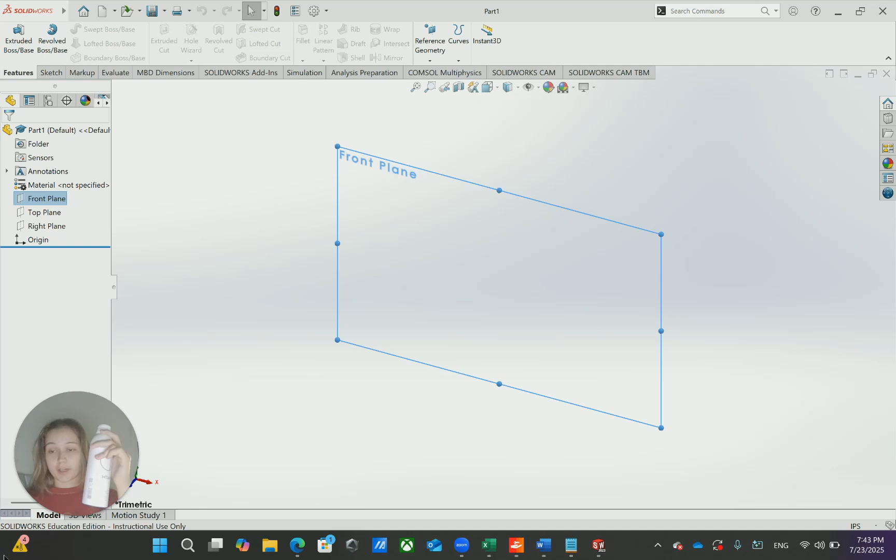First we need measurements for your Stanley Cup. I personally don't have one, but just take it, measure the circumference, and also measure how far up the bottle you want it to go. Let's say you want it to go halfway, so just measure halfway. Remember that the cup gets wider, so the holder is mostly just for the more narrow part, and that goes about exactly halfway.

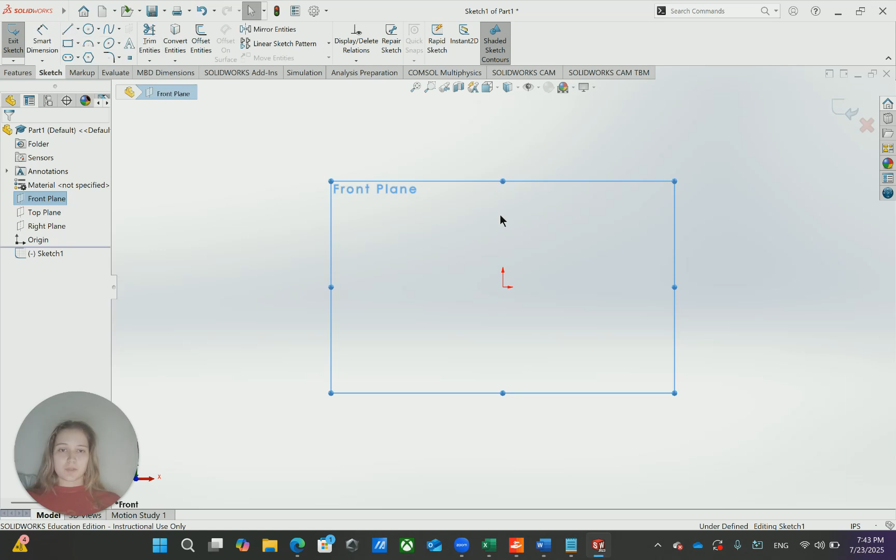So let's start. We've got a front plane. First, I'm going to do a revolved boss base, and I'm going to sketch my axis. So I'm just going to do a line, and immediately I'm going to dimension it so that we get the right dimension. Let's say this is going to be about 20 inches.

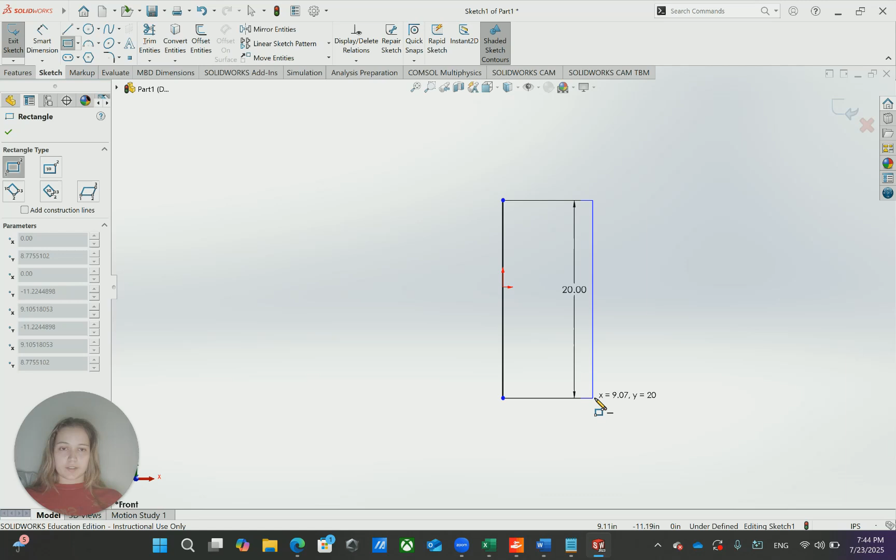Again, go off of the measurements that you get. Okay, now we're going to do a rectangle. I'm going to make it something like this.

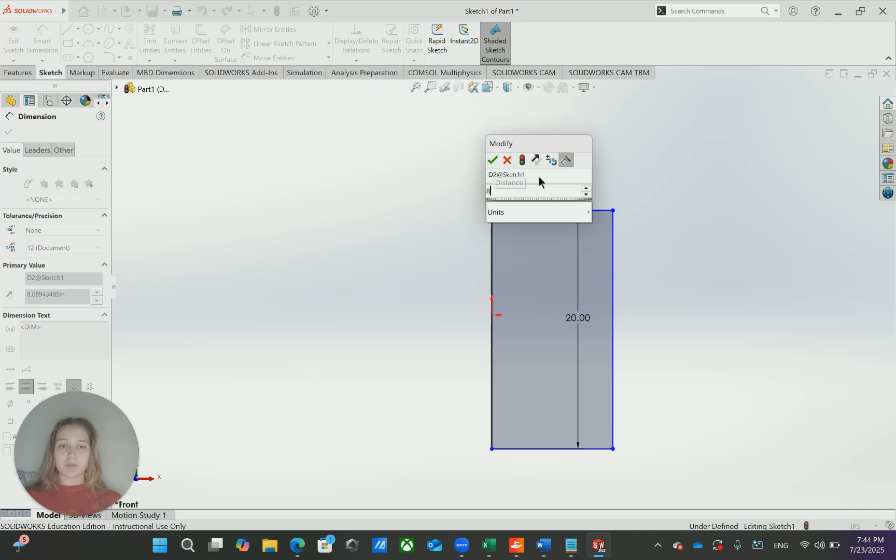And I want to measure out... let's see, I'm going to measure out about 6. I'm going to measure out about 8 for my thickness. So I'm just going to do 8 and smart dimension it. This is going to be the diameter of your cup, and add about half an inch to that so that your cup can slide in easily.

So I'm going to assume this is 8, and now I'm going to draw another rectangle, making sure that it matches my dimensions. And now I'm going to trim my dimensions.

Now I'm going to measure up from the bottom. I'm also going to measure out from the bottom. If I want to know how big this is, this is like a cheating method, but you basically just draw a line. So this is 2.14. So what I'm going to do is draw a line here to make it 2.14. There are a couple more professional ways to do this, but that's just how I do it.

So we're going to draw a line from the bottom here, make it 2.14, and we've got our dimension. I'm also going to draw this. So what is this? This is going to be our bottom pit, and this is going to be our side holder. So I'm going to trim entities.

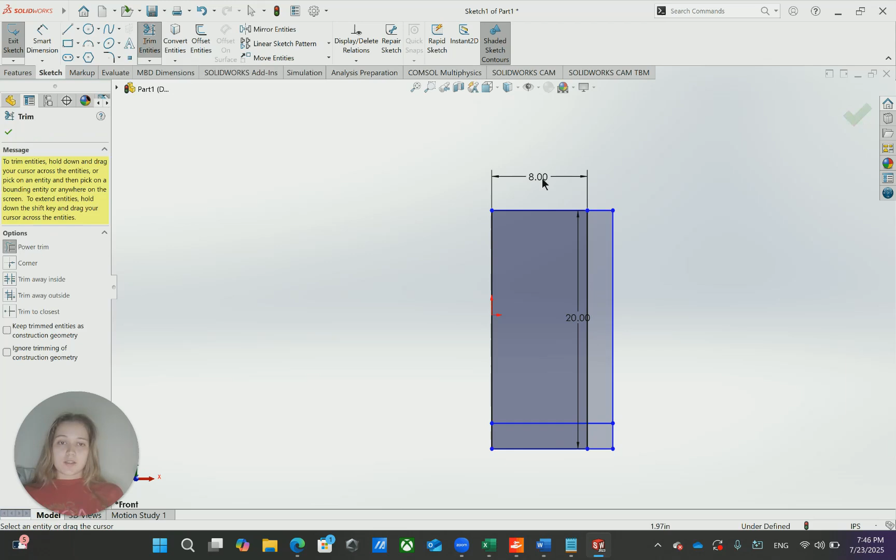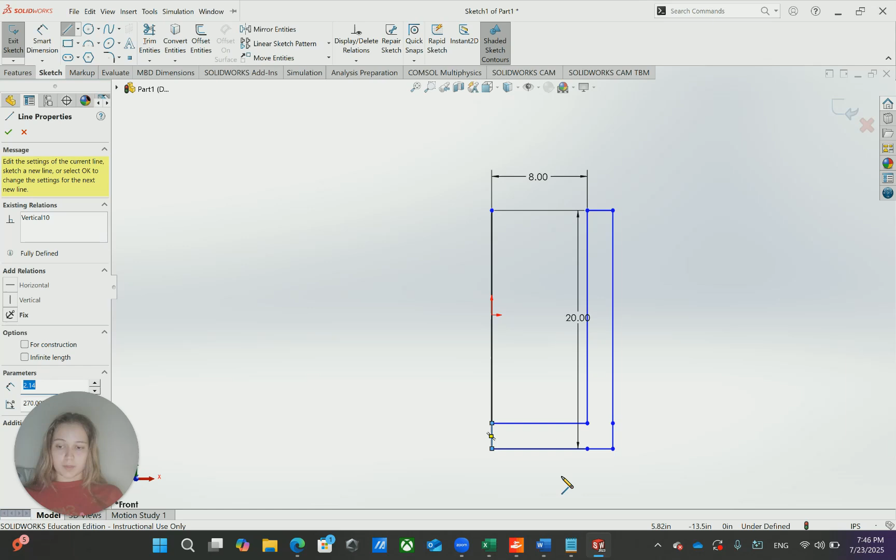So the only thing that I need - actually I should not have done that - is this side, okay? It's kind of like a side border. And don't forget to connect this entity, because otherwise it's not going to fill in. It's going to be an open sketch.

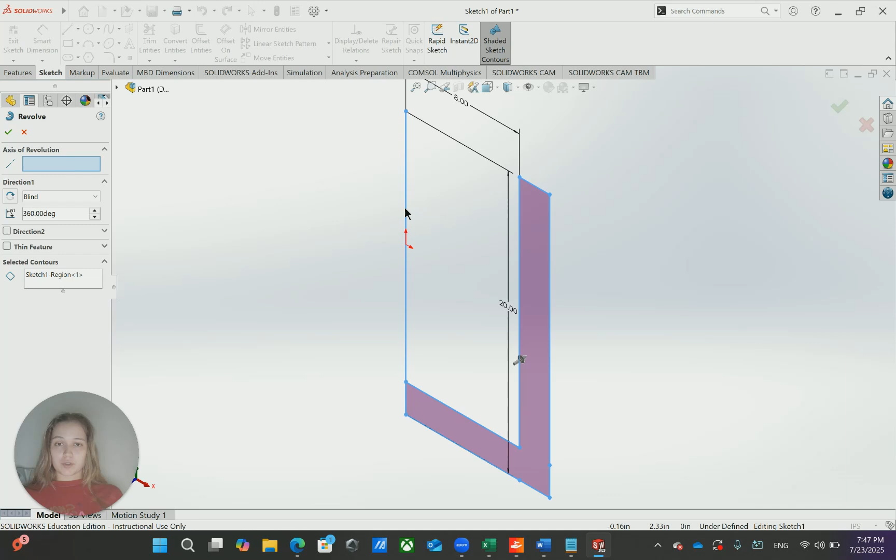So now I have my axis and I have how I'm going to revolve it. Select the contours that you want to revolve - in this case, it's going to be this specific L shape. Now my axis of revolution is the line that we created beforehand, and we can immediately see what this is going to look like. So we have the bottom, we have the sides, perfect. I'm going to click OK. Alright, so now we've got basically a simple cylinder.

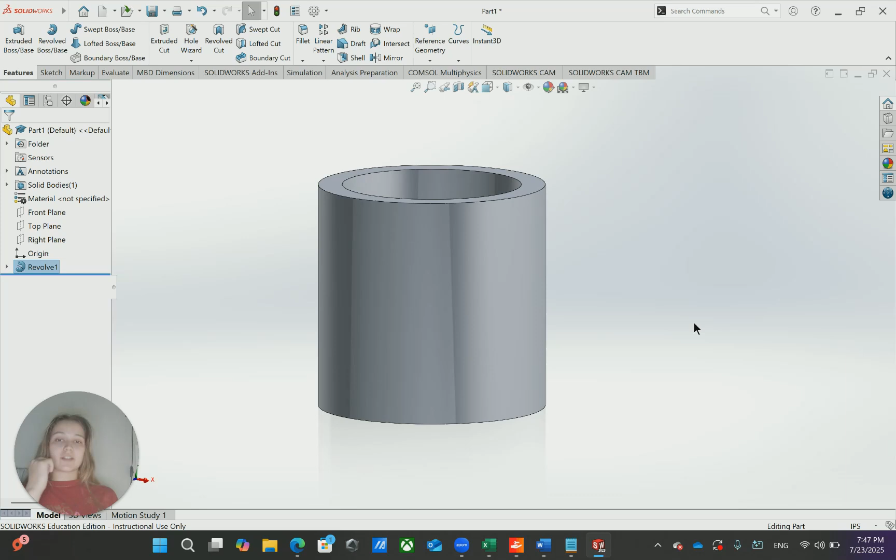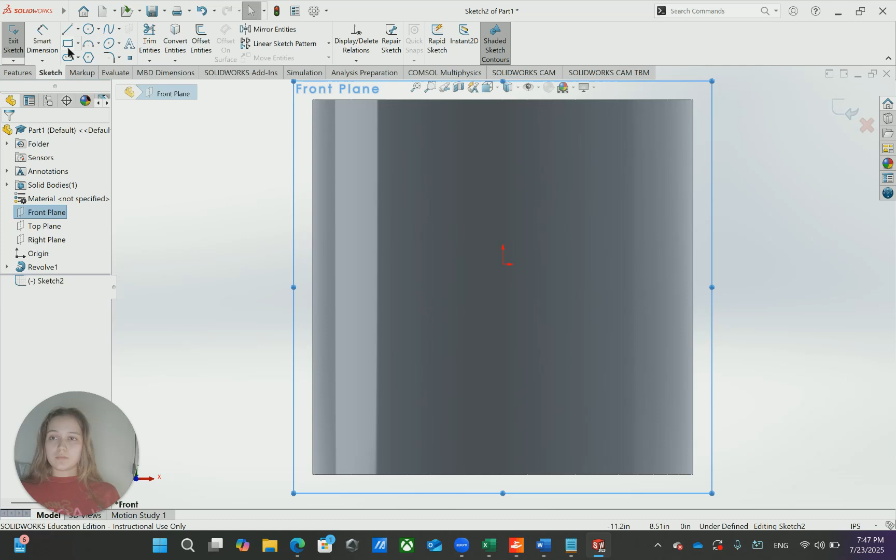Next, what I'm going to do is pattern some cuts in it. I'm going to select my front plane, which goes straight through the middle. Make sure that when you're drawing, you're on that axis, because it's going to make your drawing much easier. And I want to make an extruded cut, something like this.

Okay, so this is what I want.

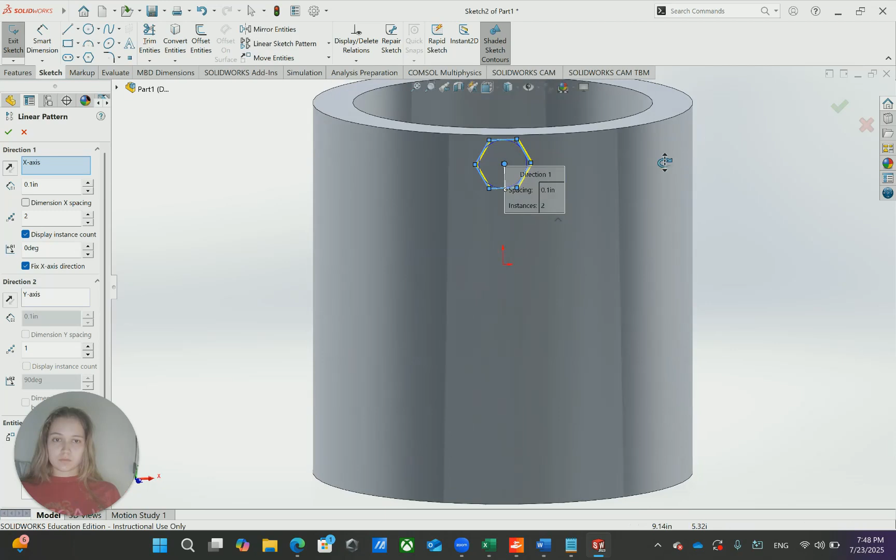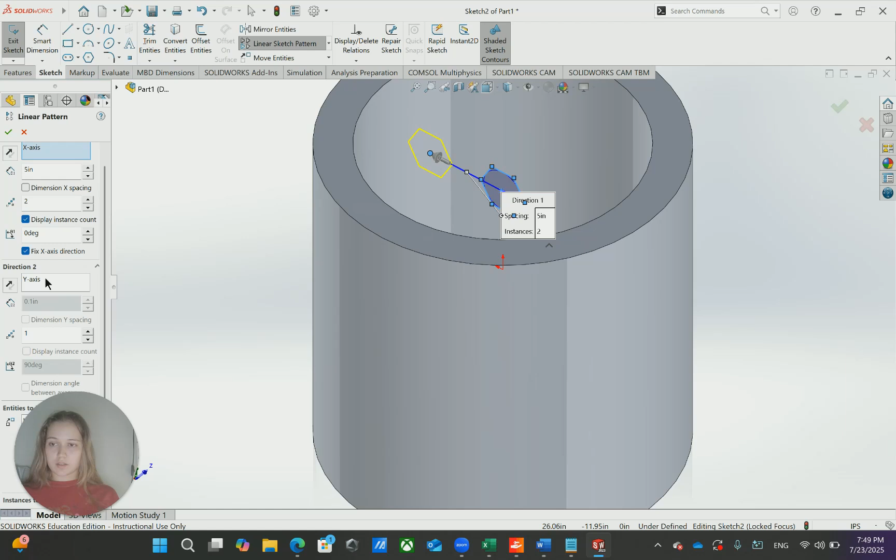So what I'm creating right now is patterning. I want to have these hexagons basically all over my cup, so I'm just going to test out the dimensions. Maybe this is good. I'm going to create a second direction also, make two this way, and I'm also going to make the spacing as 5.

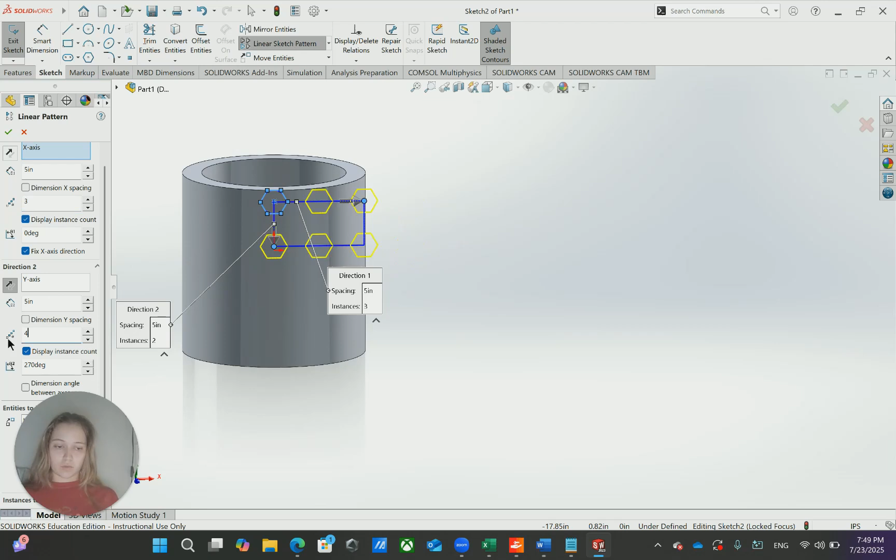Only I'm going to make it down. So to flip the direction, you just click on these two. Let's say how many do I actually want? I want to have maybe 3 this way, and then maybe 4 down. Alright, something like this.

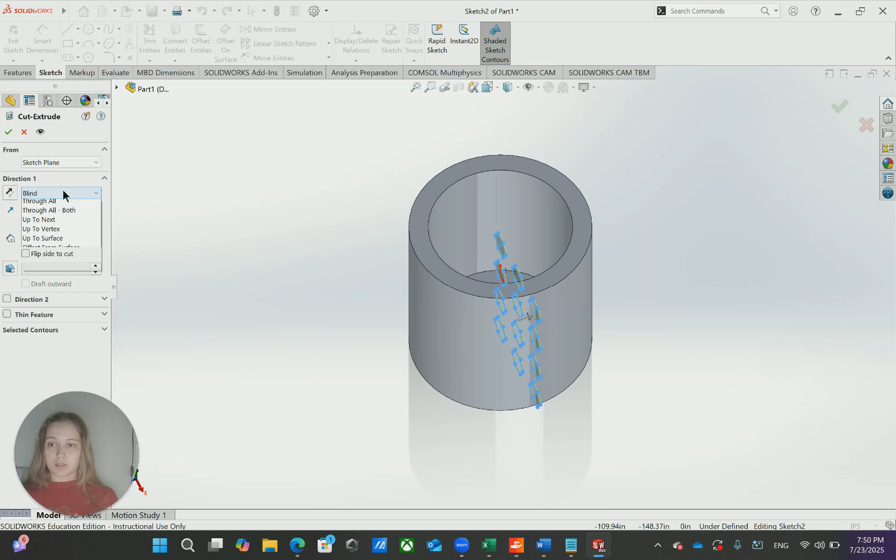Now, when you exit your sketch, you need to make sure that you're cutting on both sides. Right now it's only cutting this way and it hasn't been cutting through anything because we don't have a solid surface, so I'm going to do through all, both, so that way this cut is going through both sides. I'm going to click OK, and look, we've got our sides.

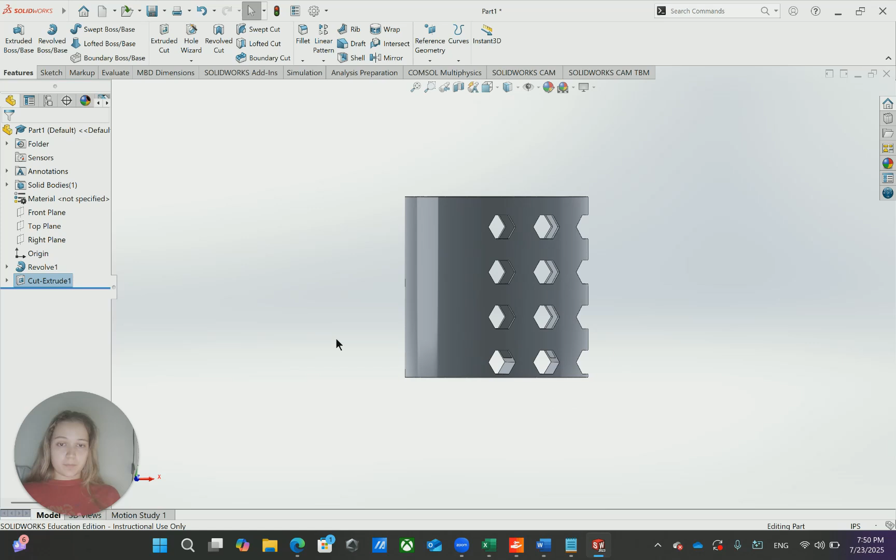Okay, so now you can keep it like this if you'd like. I'm going to make it symmetrical, and the way to do that is I'm going to select my right plane, then select the mirror feature.

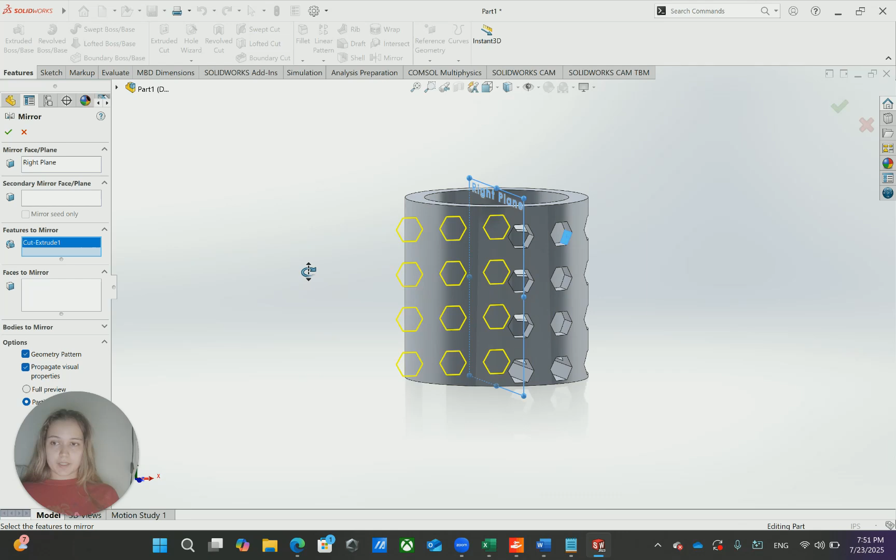So I'm going to click features to mirror, and then I'm going to click on here, that's going to be my cut extrude. I'm going to click OK, and now I have a symmetrical cut.

Also, just a quick tip: sometimes if your cuts are overlapping, SolidWorks is going to make your entire pattern disappear. So what you want to do is click on geometry pattern, like I clicked in the video, and that way it eliminates this issue. Just so you know.

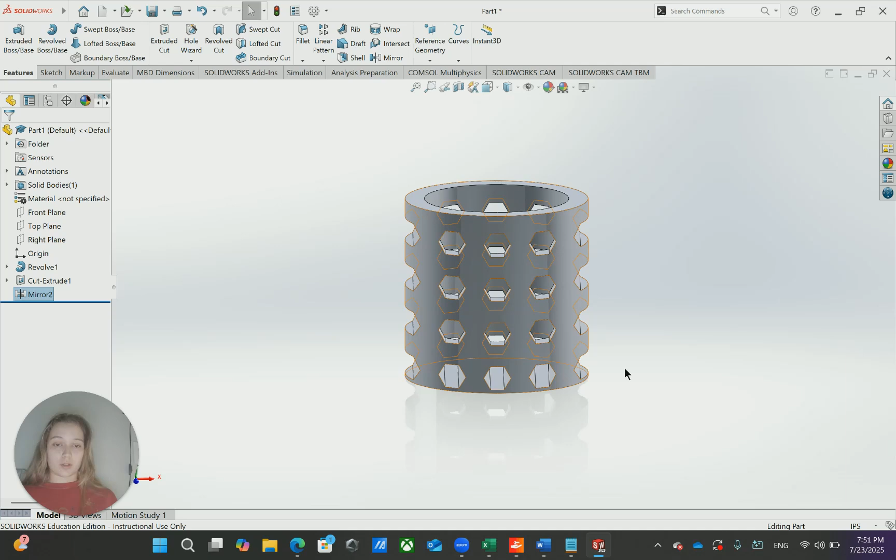Alright, so just like this, we got ourselves a holder, and you can do this with any kinds of patterns that you like. You can also smooth the top edges if you want.

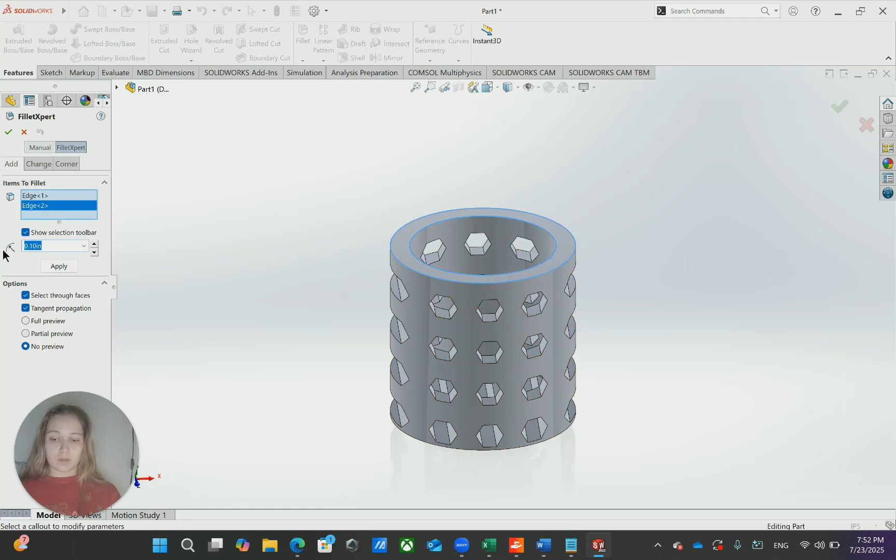So let's say I wanted to make a fillet. I'm going to fillet this and fillet this, maybe to like 0.1 inches or something like that. To be honest, I don't like how this looks, but if you are into something like this, that's also what you can do.

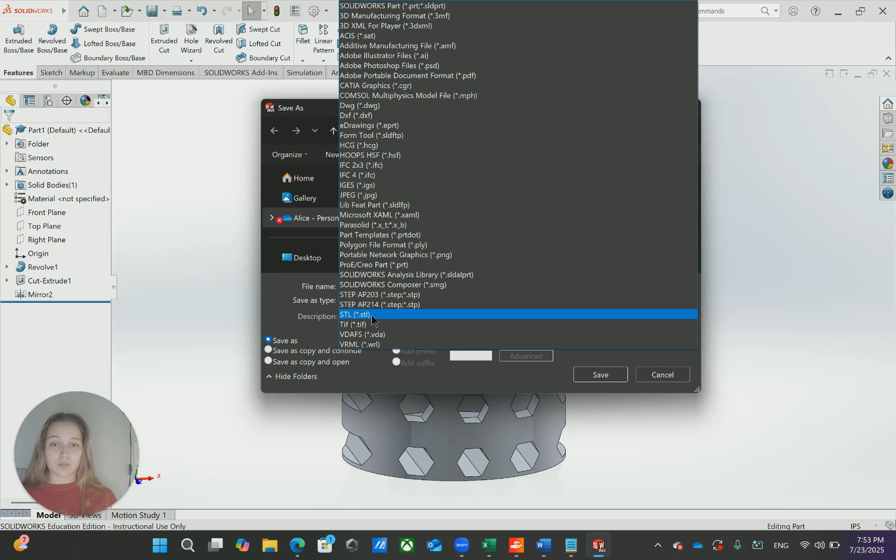Okay, so now I'm going to render it, but basically this is ready to go. You're going to export it as an STL file. You're going to click save up on here, save as, and then go into the folder that you want to save it in. In type file, obviously save it as the SolidWorks file just so you don't lose it, but if you want to print it, you're going to save it as an STL file, .stl. That's the only file type that 3D printing equipment reads. All right, so now I'm going to render this.

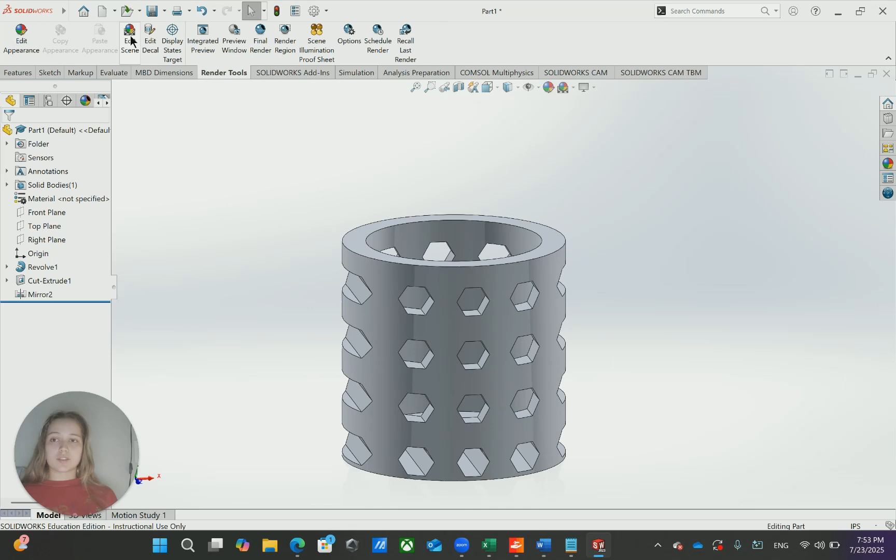I'm going to go into my PhotoView, which is located in SolidWorks add-ins. It loads for a second, and then I go into my render tools and go into edit appearance up here. This is how most of your rendering is going to work, you're just going to edit what this looks like.

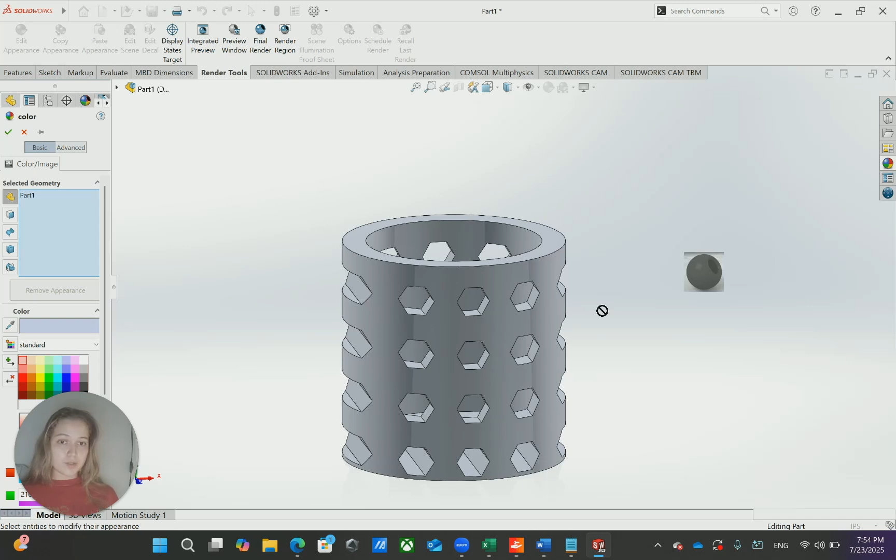So let's experiment. I might just go with glossy rubber, and for the color, maybe something like this. I personally like it, so let's assume that this is good enough.

Now to see what this actually looks like, I'm going to turn on a preview window. You can also do an integrated preview, so it's immediately going to show you what this looks like on your screen, but I don't recommend it. It makes SolidWorks really slow, and it's already slow.

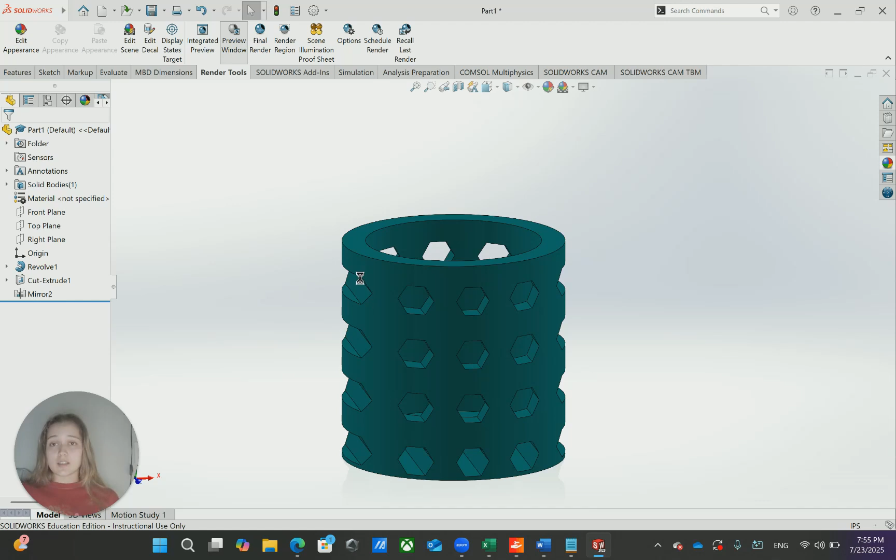So, you know, final render is basically the same thing, it's going to show you what the feature is going to look like at the end after you've rendered all of it. I would recommend just using the preview window because it puts a little less pressure on your computer than doing the preview immediately, and it doesn't slow down the process as much.

So this is what our cup holder looks like, and I think I'm pretty satisfied with that. I'm just going to wait for the image to load and save it.